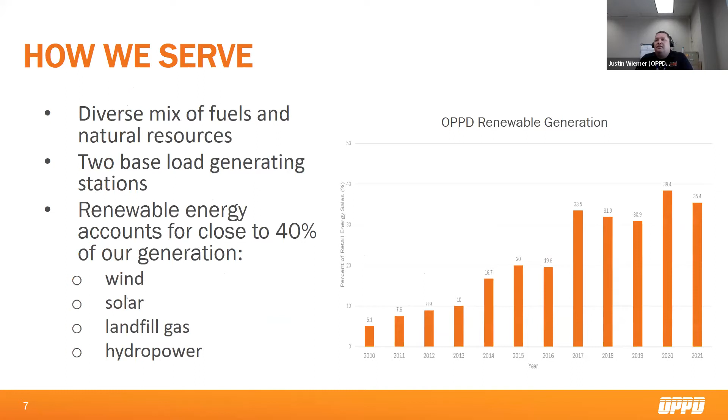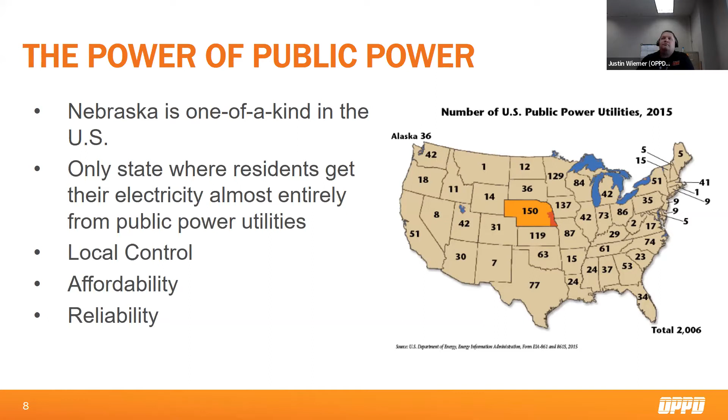And I guess that's it for my summary. Mike, you're up for landfill gas generation and capture.

Sure. Thanks, Justin. Can you guys all hear me? Hear me okay? Okay, cool.

All right. So I'm going to jump in, kind of like Justin said, and talk about the landfill gas. I know this is focused on methane, but that's a piece of landfill gas, and how we collect it and then how we refine it before Justin talks about how we use it. So go ahead and click the next slide. We'll start in.

Okay, so again, methane is a piece of this landfill gas, and the first thing we need to talk about is what is landfill gas, or LFG. Landfill gas is basically the natural byproduct of the decomposition of organic materials, organic being something with carbon in it, at landfills. So when you send your trash to the garbage truck and the garbage truck takes it out to the landfill, you probably have materials in there that have some kind of carbon in them. Plant-based, food-based, even manufactured materials have carbon in them.

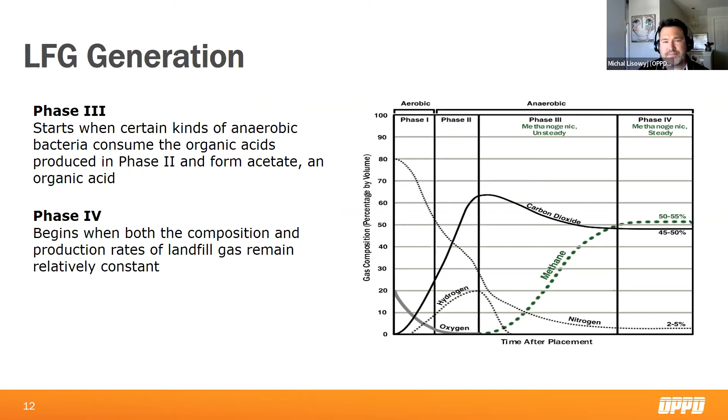So there's a bunch of factors that affect the production, as you can probably guess. So temperature of the landfill: it's going to increase bacteria activity as it grows, like many other processes. Moisture being there encourages the decomposition. Presence of oxygen, we kind of just went over that. You don't want oxygen there, so we need that oxygen gone before we can get methane. The age of the materials that are in the landfill: usually stuff that's more recent is better to produce gas, or we produce more kind of at the beginning. And then the composition, which is huge in any kind of biogas or landfill gas. The composition of what's in there, you need organic waste, so something with carbon in it.

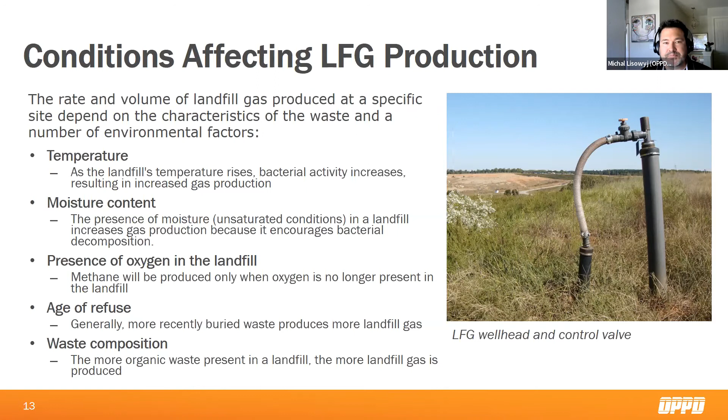So methane, I've been mentioning methane. I think that was one of the focuses of this talk. But methane is really the energy molecule. Its chemical composition is CH4. It's a carbon with 4 hydrogens around it. It's a gas that's basically natural gas. I mean, natural gas is mostly methane with some other stuff in it. This is kind of similar. So like we said, this is about 55% methane. It is a greenhouse gas.

I don't know if a lot of people think about methane as a greenhouse gas, but it is. It's the second most abundant greenhouse gas after CO2. I think CO2 is most of the headlines you see, but methane is also out there, and that last bullet is important. And again, I don't think a lot of people realize that methane is more than 25 times as potent as CO2 at trapping heat. So it's a large contributor to potential climate change and any of those aspects that you think about with greenhouse gases.

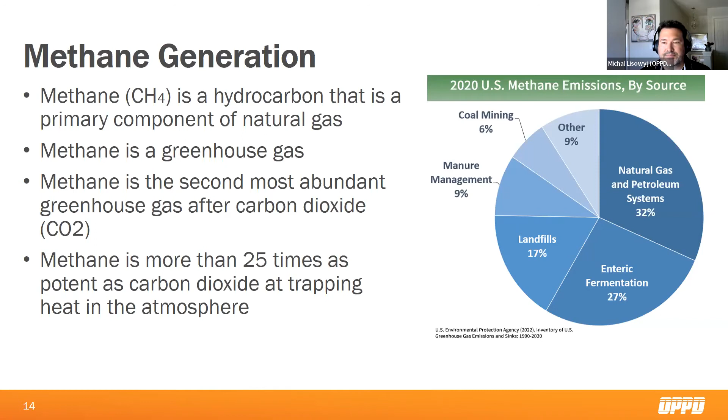And what happens is that gas, as it's produced in the waste materials, is pulled into this pipe or vertical well. We have blowers and vacuum systems potentially downstream that basically pull the gas out. It kind of just seeps out of this wellhead. It's not a very complex process when you're out in the landfill, for sure. So yeah, this is basically the most common way.

There's other ways where they horizontally drill in, and the vertical is pretty much what you'll see. And just for info, our Elk City Station currently has 108 of those extraction wells out there.

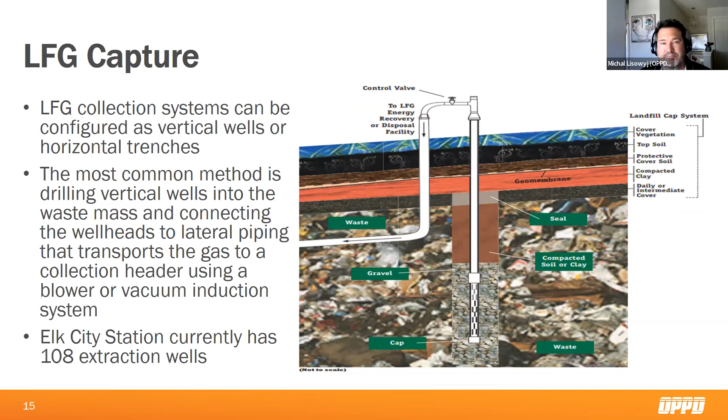So let's go next. All right, so we kind of talked about how we generate it. It's generated through all the processes with the bacteria. We talked about collecting it. Well, you have to process it because the landfill gas coming out of there is pretty moisture rich, I would say, and then it's also got impurities in there that we don't want to burn or use in our processes.

You've got blowers that provide the vacuum to pull the gas kind of throughout the system. You've got the flare that will off gas and burn parts that we don't want. And then we use this to clean it up before we use it in our machinery, because any of those materials are stuff that we don't want. Elk City, it has the blowers and vacuums that they can go at a rate of 1,100 cubic feet per minute.

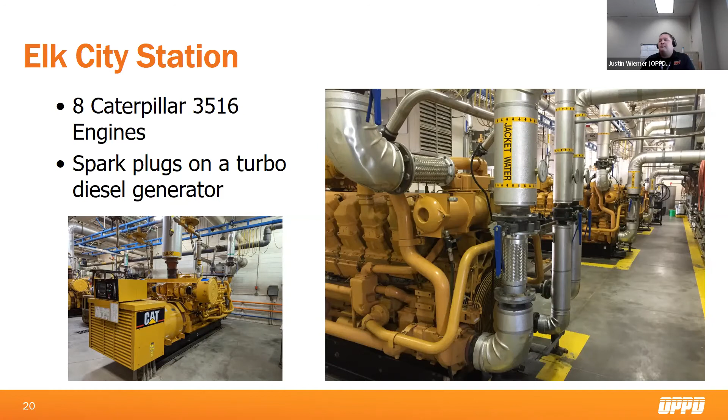What's the other one? Do you use another power source in this area, or does the methane gas cover the power for the whole area? So let me go back to one of the early slides. So this is the OPPD service territory. The total generating capacity of Elk City is roughly 6.4 megawatts.

If you look at the larger OPPD footprint, our load is going to be somewhere between, say, 1,000 megawatts on kind of a really nice day, you know, sunny, 70 degrees in April. Pick a day when there's no air conditioner, kind of limited industrial use, to a hot summer day like what we've been experiencing plenty of already. And that would get you into the 2,400 to 2,500 megawatt range. And I don't have the exact peak load for OPPD handy, but it's in that neighborhood of 2,500 megawatts.

So we will always cover our load within OPPD. That could be using any of the power plants that we have, or even purchasing off the market, or our purchase power agreements with several wind farms, which are all throughout the state of Nebraska, not necessarily inside OPPD service territory.

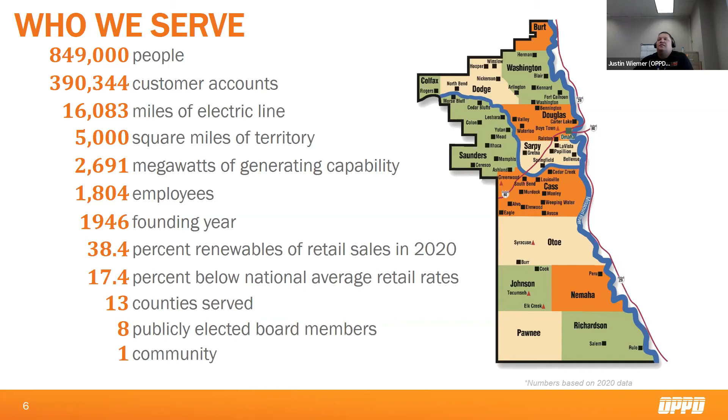All right, and then Peggy asks where Elk City is. So it's right next to that landfill. Let's see if I can guide with this. So here's Bennington, if you can picture that over on the right hand side. So if you just drive Highway 36 and go past Highway 31, so 31 goes north and south here, 36 goes east and west. It's about a mile from that intersection. Then Elkhorn would be down here beneath where the cutoff is.

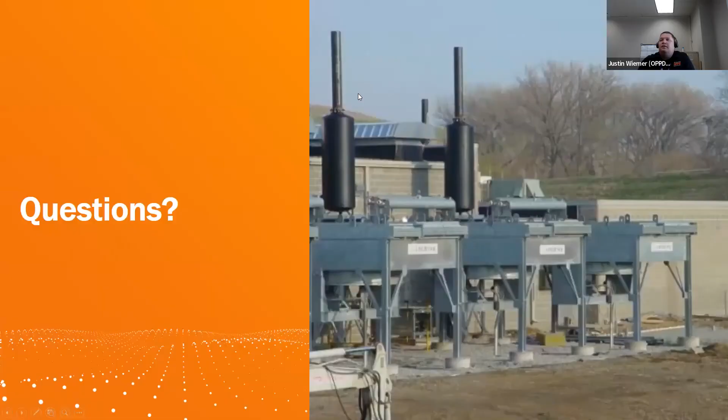It's a small percentage, but I'd say it provides a lot of value because, going back to the greenhouse gas aspect, this has a pretty bad greenhouse gas effect from letting methane escape into the atmosphere, so being able to combust that and get something useful out of it is just a great thing, right? Because otherwise the answer is just to flare it. We're getting somewhere between 1,000 to 4,000 homes worth of power by consuming a gas that otherwise would be flared. So overall, I think it's a great project, and it's served OPPD really well over the last couple decades.

Oh, let's see, what does that one say? Oh, never mind. Yeah, all right, well, we got another one.